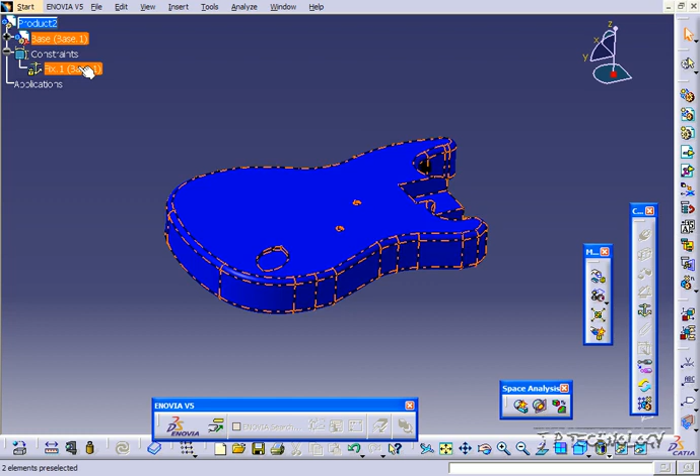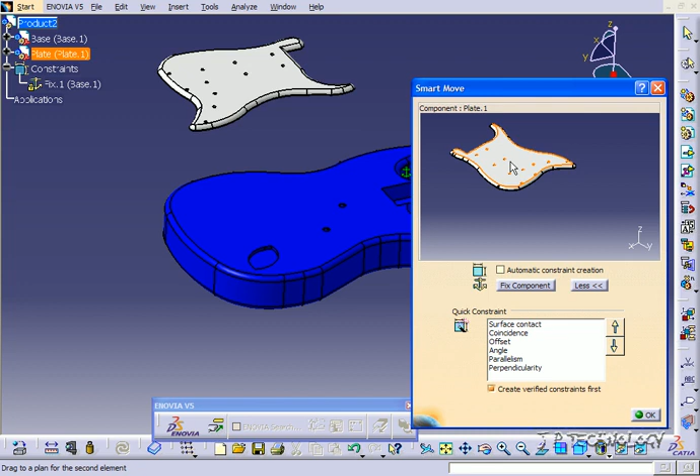Under the Constraints tab, you'll find all of the other constraints we're going to add in. Now that we have it constrained and fixed down, let's bring in the other components. So let's click Insert, click Existing Component with Positioning, click Product 2, and let's bring in the plate. Click Open, and just move it around so that it's not hidden underneath the guitar base. Click OK, and now let's add some constraints.

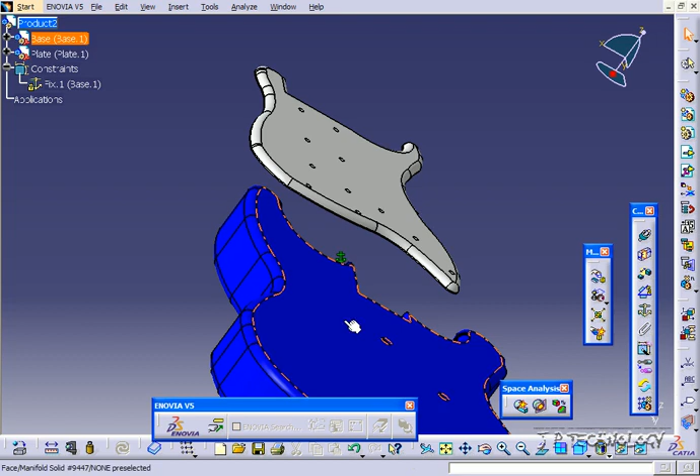So what we need to do is, I've created a few pilot extrudes here. These extruded circles are going to have to go into these cutout circles, and then we're going to have to create a coincident constraint between these two extrudes and circles, and then we have to make a contact constraint between the two faces. So let's start off with the circles.

Let's click coincident constraint, and what you have to do is just place it over until you get the axis line. So click that axis line, and we'll click this axis line. So we have our first constraint.

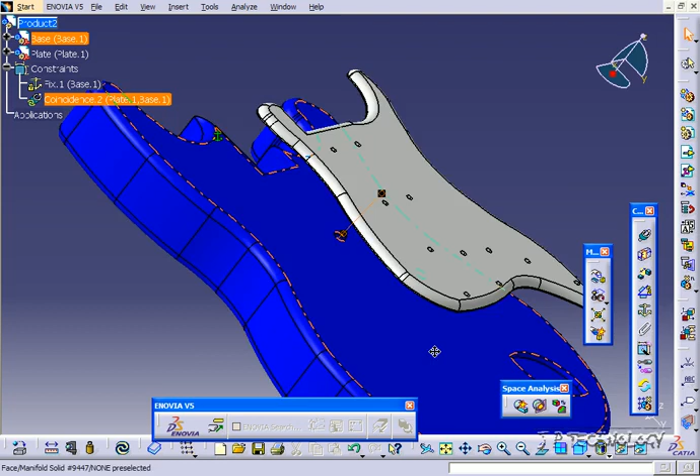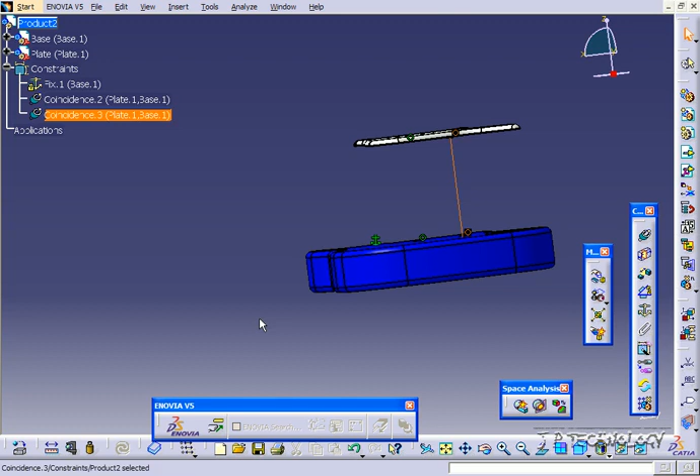Click coincident constraint again, and we'll click this face here, and we'll do the same to this one here. Now we've got both of our pilot holes and extrudes lined up, so let's click Update, and now they're lined up with one another. Now let's click the contact constraint, and we'll click this face here and this face here, click Update, and now we've got our plate positioned correctly on the base.

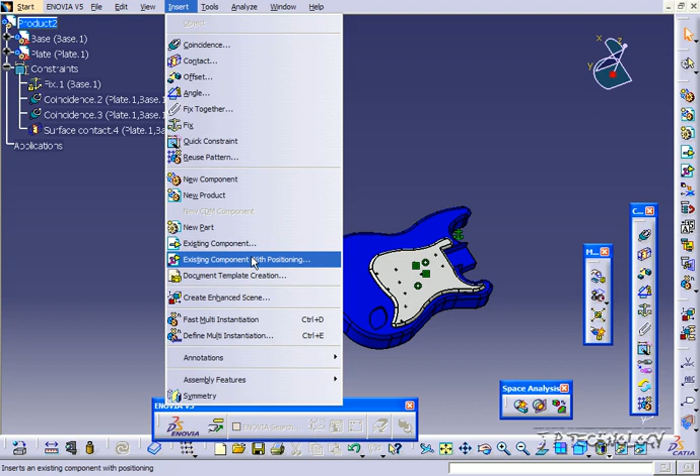Now let's bring in another component, so let's click Insert, click Existing Component with Positioning, click Product 2, and for this one let's bring in the bars, click Open, and now we've got the bars to position. Click OK. Now if you look under here, there's 6

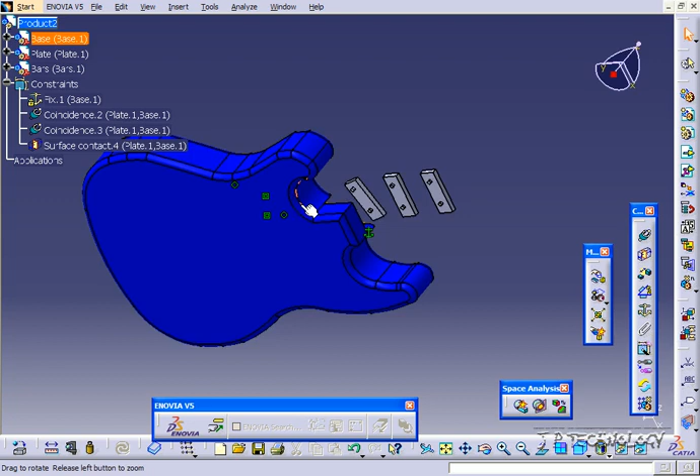pilot extrudes that I made, and on the plate there's 6 pilot holes. Now when positioning this though, because rather than having individual parts for each one, I made it in one part, all we have to do is use 2 holes to position it. So whenever there's say multiple holes like this, and all I need is 2 holes or extrudes to position, I'm going to pick 2 that are on a diagonal from one another. By choosing 2 that are on a diagonal like that, you're able to position and lock it in.

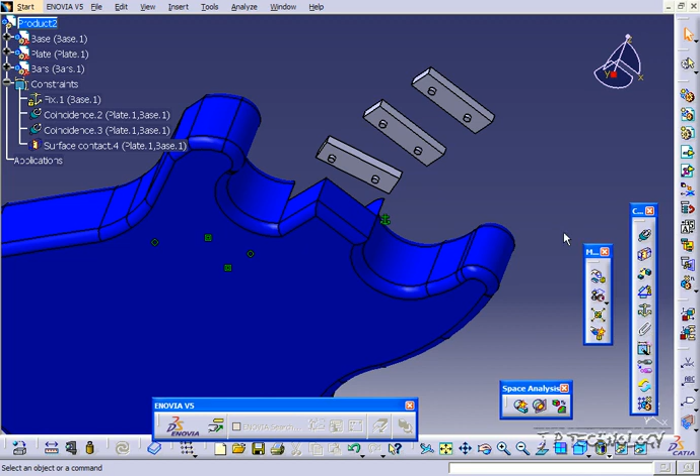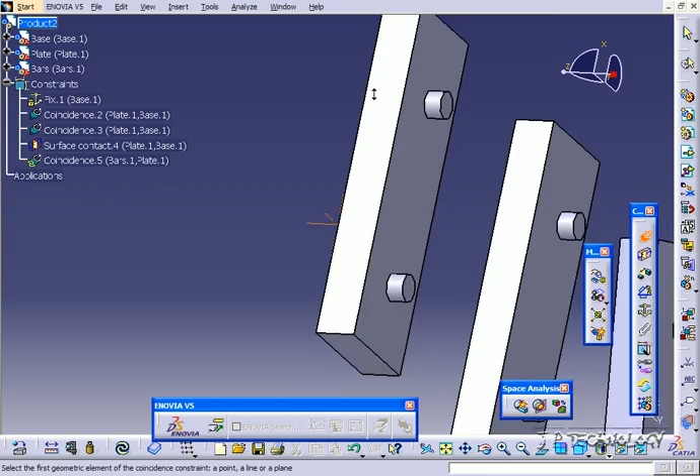So let's click coincident, and let's choose this one here, and we'll choose this one here. Now we'll click coincident again, and we'll choose this one here, and we'll choose this one here.

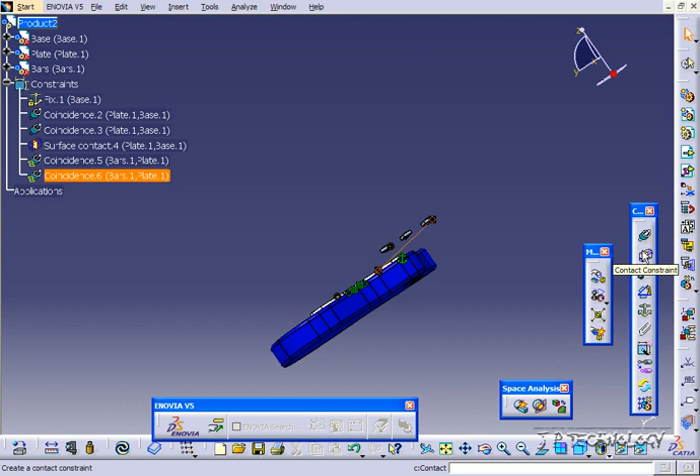Now in the last one I used 2 steps. I did the holes, then I updated, then I did the contact constraint, but you can do it all in one shot too if you know what's going on. So I'm going to do the contact constraint too now. I'm going to click this face and this face. I'm going to update, and everything gets locked into position.

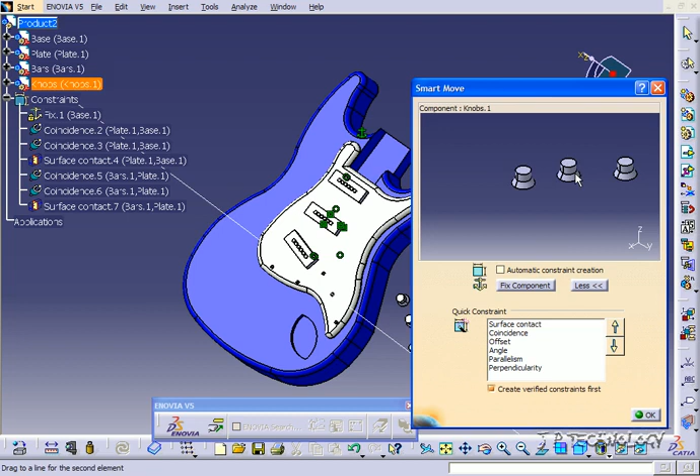Now let's bring in another component. So let's click Insert, Existing Component with Positioning, and this time let's click the knobs, click Open, and just position them so you have access to them. Click OK, and let's rotate it around.

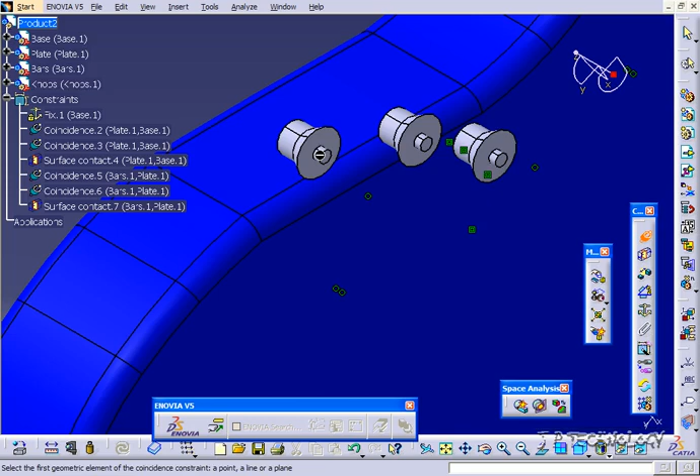And again with this, instead of creating each individual one, I created all 3 in one part file, so all we need to do again is use 2 of the circles to position it rather than using all 3. So we'll click coincident, and we'll click to get the axis, flip it around, and we'll do the same over here.

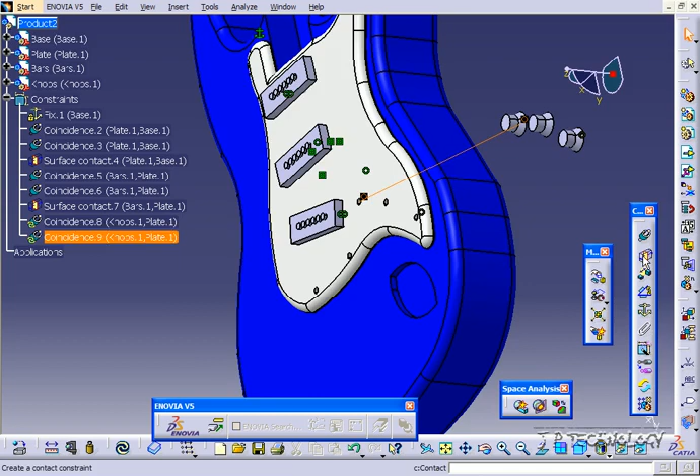Click coincident, and we'll line up the axes again. And we'll do the contact constraint too. So we'll click this face and this face, click update, and now we have our knobs positioned correctly.

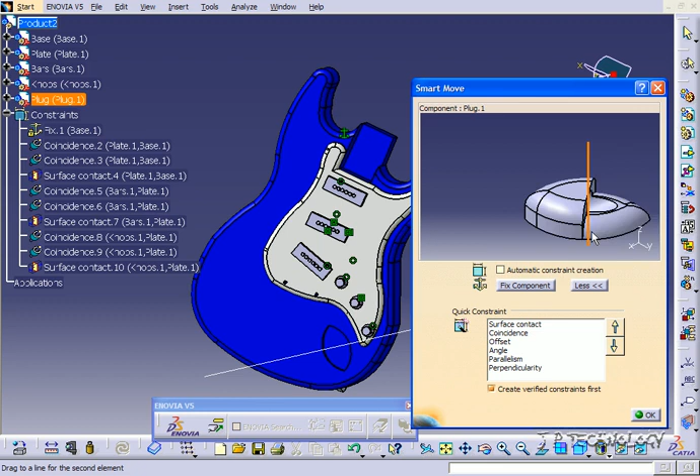Now let's click insert, and we'll bring in another component, so existing component with positioning. Click product 2, and let's bring in the plug. Click open, and just move it out to the side until you can see it. Click OK.

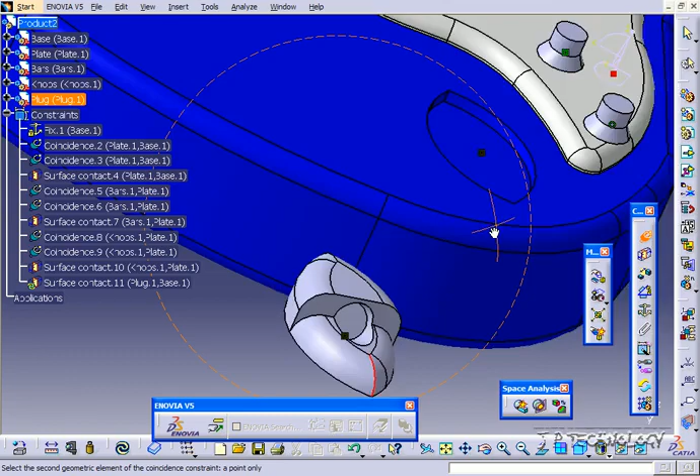Now let's position this guy too. So we'll click contact constraint, click this face, and then we'll click a coincident constraint. We'll click this line, and let's rotate this around, and we'll click this point. Click update, and now we've got our plug sitting in the slot there.

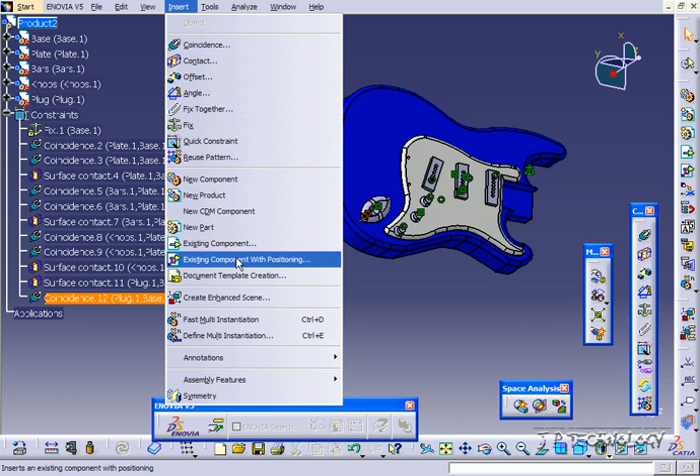Now let's bring in another component. Let's click insert, existing component with positioning, and for this one let's bring in the mount. Click open, and just move it out to the side again so you can see it. Click OK, and this mount is going to go onto these 2 holes here.

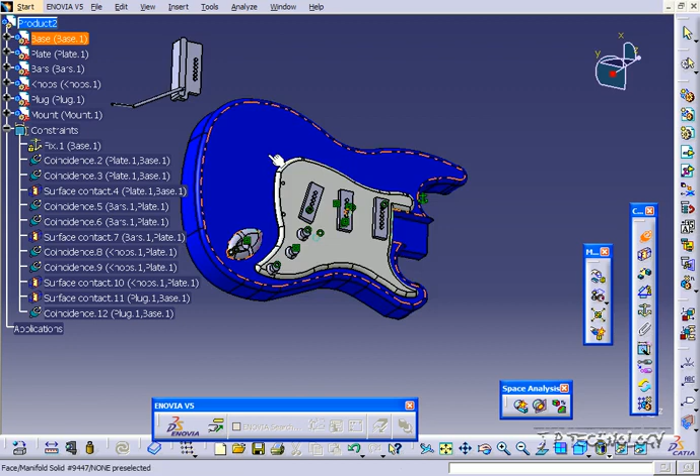So let's line up the holes, and we'll snap it onto this face here. So let's click coincident constraint, click that circle, and we'll click this circle here, and we'll do the same to the other one.

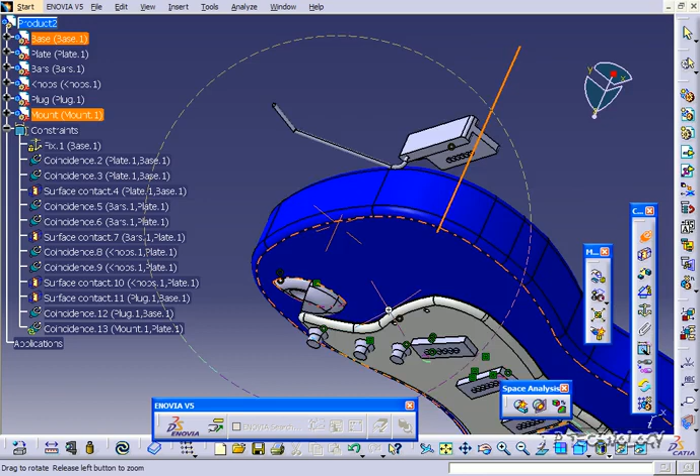Click that face there, and we'll click this face here. Now we'll do the contact ones too. Click the bottom face there, and click the top face of the plate here. Click update, and now we have the mount at the back. So now we have all of the little parts mounted onto the plate and the base.

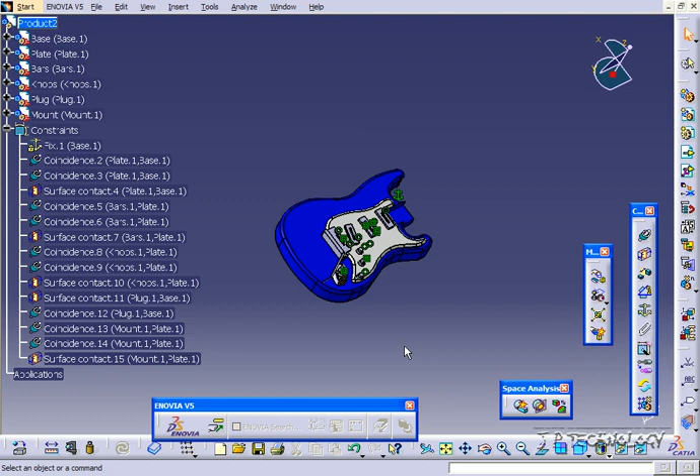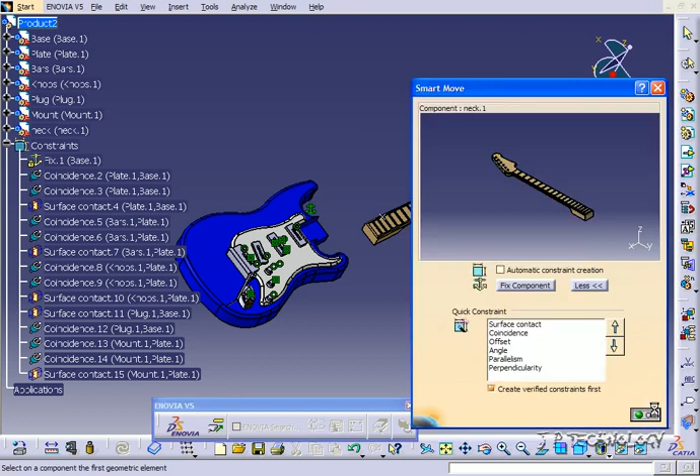Now we're going to have to bring in the neck and the strings. Let's bring in the neck. Click insert, existing component with positioning, click product 2, and let's click the neck, click open, and just move it around a little bit so we can play around and get the positioning on it. We'll click OK, and now let's mate this neck.

Let's click contact constraint, click this face here, and click this face here. So contact that face and that face. Click update. Now once you make it, I want you to delete it just because of the geometry with this guitar. To position it where I want, I need to make a contact constraint here and then delete it so it kind of remembers, and then put the other ones in. If not, it's going to create a few errors.

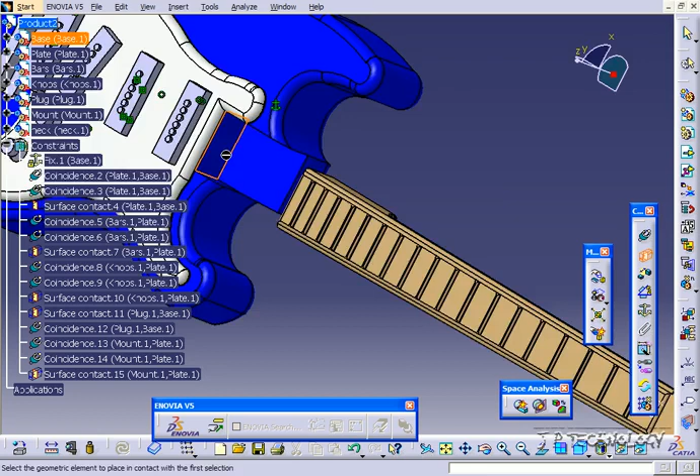So we're just going to delete this, click contact, then we're going to click this face and this face, click contact, click this face and this face, click update, and now we have our neck in the position that we want.

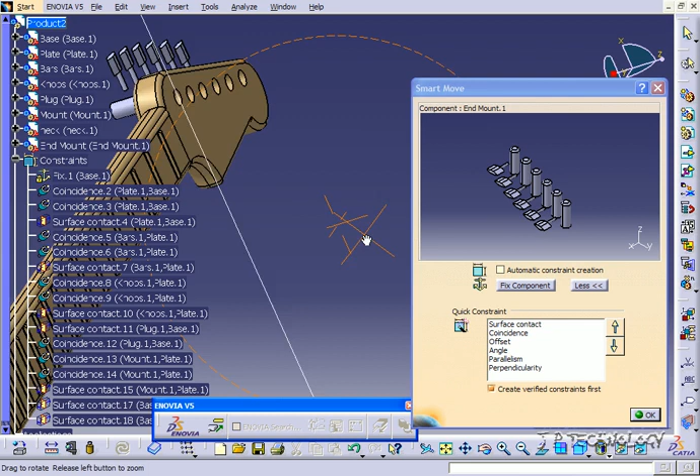So now let's bring in the knobs at the end. Let's click insert, existing component with positioning, and let's bring in the end mount. Click open, and it's already near the end there. Now you're able to move it around if you need to, so just move it around, click OK.

Let's line these circles up. Click coincident, click that circle there, and do the same at the end. This is just like the other part. You can do each of these as individuals. I threw it all into one part so that it's easy to assemble. Click update, and now they're lined up.

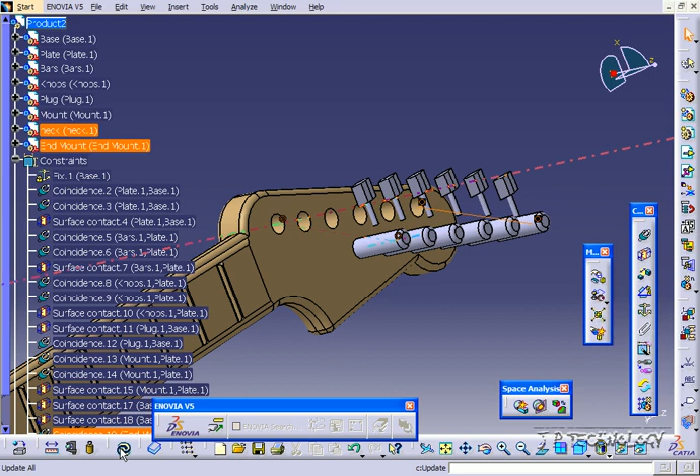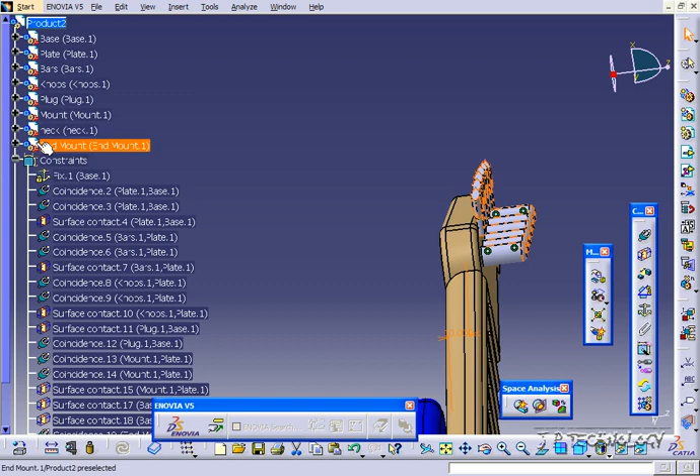Now I'm going to click the offset constraint, and click this face here to this face here, and make it 10, click OK, click update, and as you can see it's too far up, so go down to that constraint, double click on it, change it to 0, click OK, update it, and now it's in the position we want.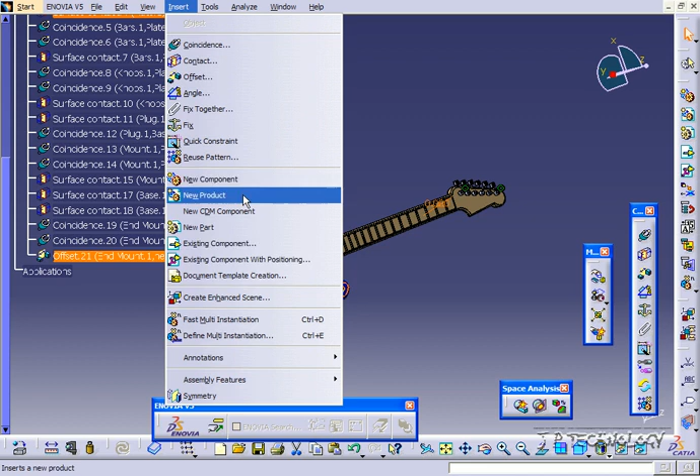Now when we put the strings in, we can move this up and down if we want to create a better look and better positioning. So now the last thing we have to do is bring in the strings. Let's click insert, existing component with positioning, click the strings, click open, and click OK.

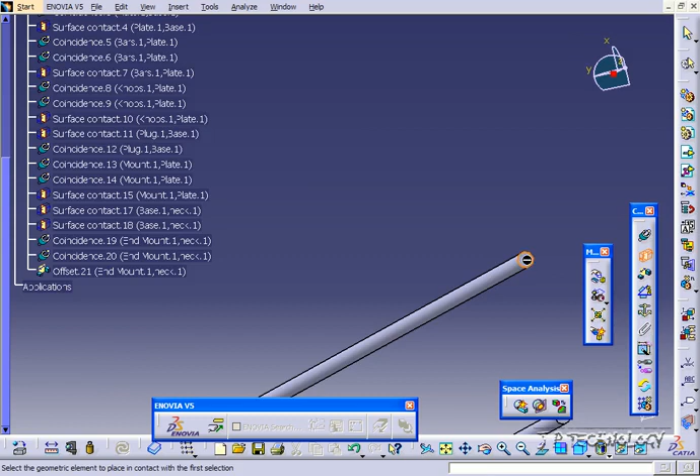Now the strings are already positioned, they're all up top there. So the first constraint we're going to do is click contact and zoom in to the strings and just touch one of the faces. We're going to make it touch the back end here. Click update, and the strings are up top there, but they're in line.

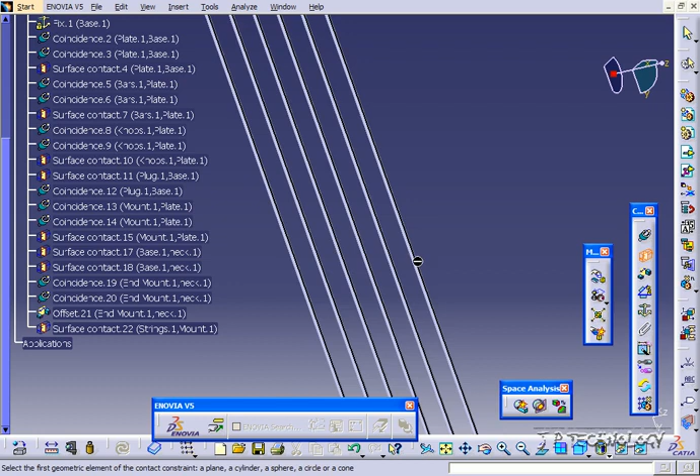Now we'll click contact again, zoom in on the strings, and try to get a touch on it. We'll zoom in and just touch one of these faces here. Click OK, click update, and now it's going to be tangent to the surface there.

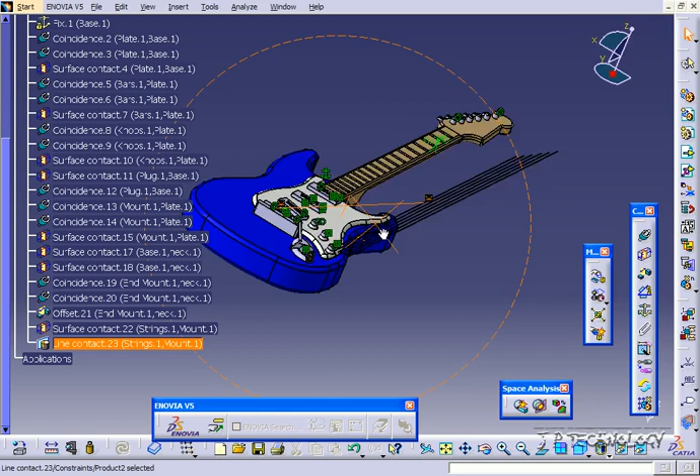Now what we're going to do on the last one is we're going to do an offset. Click offset, and again zoom into these strings, click one, and click the end face here. Right now it's at negative 157, so let's put it to negative 20. Click OK, click update, and now we're going to have to just move it around and position it to get the best look and feel.

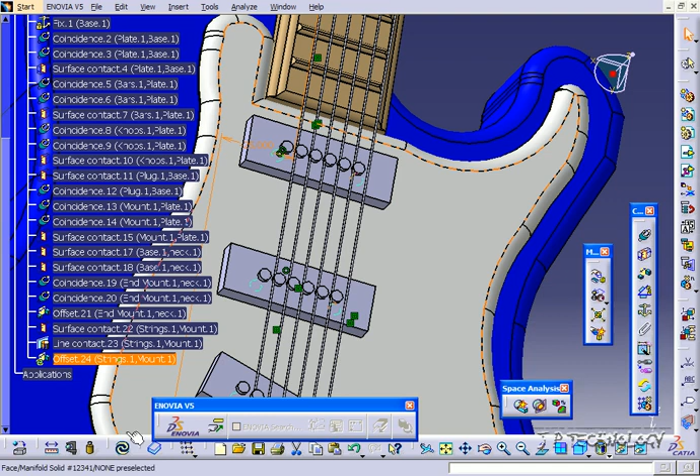I think we're going to have to move it over maybe 10, so let's double click on it and make it negative 30. Click OK, click update, and that looks like it was too much, so make it 25. Click OK, update, and maybe just a bit more. Let's try negative 26. Click OK, update, and that looks about right.

And if you go all the way to the end, you can see that they line up nicely. So with this last one, you're just able to kind of move it around and position it to the look and feel, and just move it around to fit the rest of the parts and components.

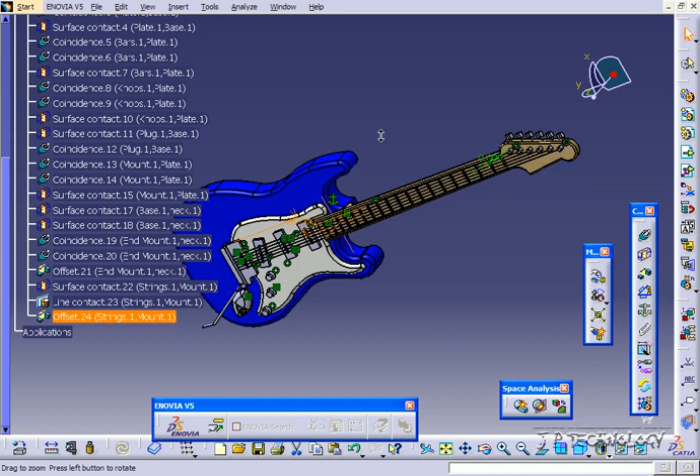So what we've done in this tutorial is we've brought all the components together using constraints, and we've fully constrained this entire assembly of creating the guitar. By pulling in all these different components, and from the lessons we learned before, we were successfully able to create this guitar. And that concludes our tutorial on the guitar constraint assembly within Catia V5.